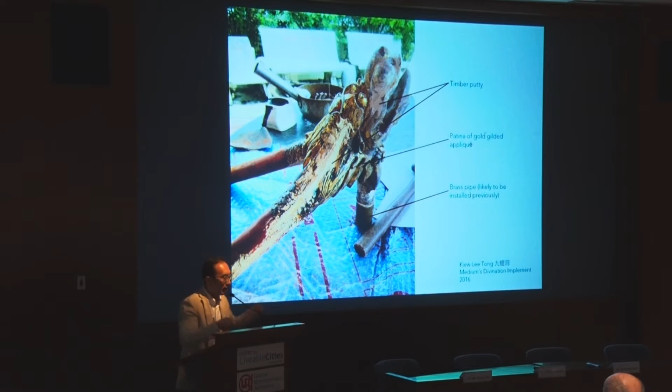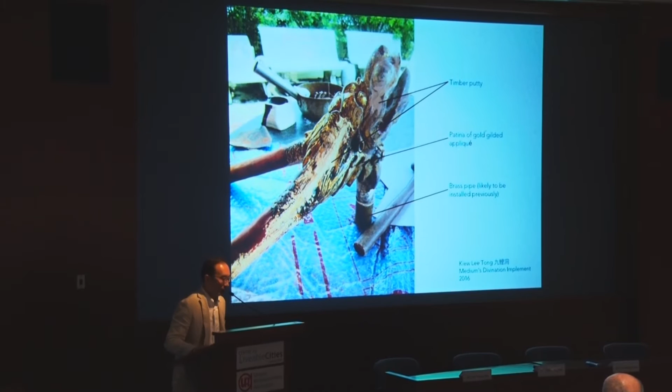You hold it - the medium will hold the fork, and the one in the base, which is a brass pipe probably installed previously, was then used to write on a sand plate for divination when the medium is actually being possessed by the deities.

So here we are. I talked to the craftsman, who was actually a member of the temple, and he was repairing this particular piece. So I asked, how old is this piece? I was very excited about this.

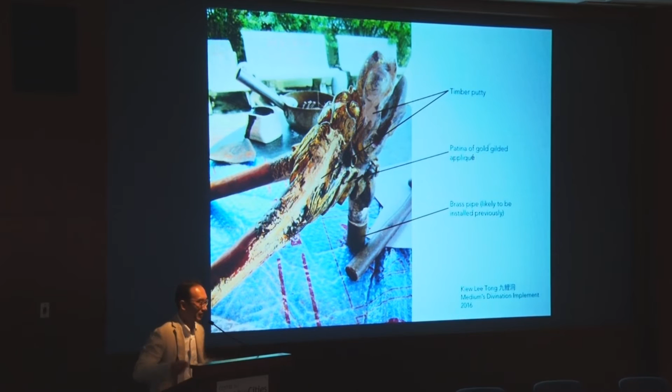Probably around three generations in the possession of the temple. There were cracks because the medium is very excited, right? And there are cracks, and he has applied some timber putty. And on this, there's a very nice patina.

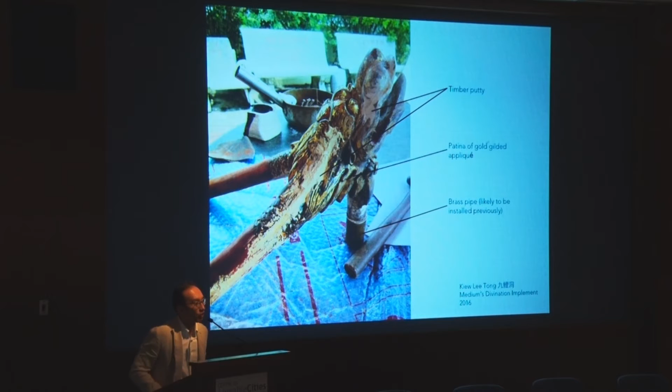And as our conversation progressed, he got excited too. He went to the storeroom and took out a piece that is complete - he has completed the restoration, and this is it.

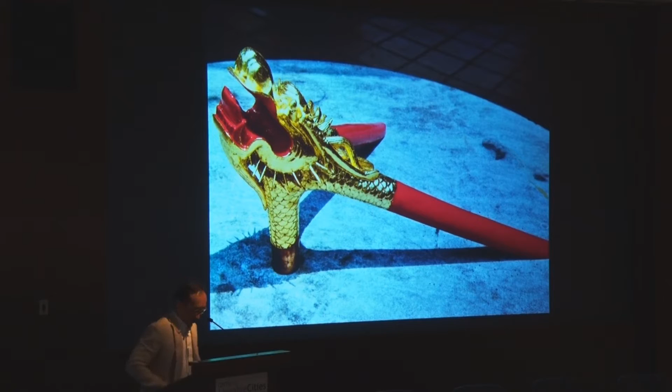And this set me thinking that there is actually a very strong distinction between the Western approach towards restoration, which we have all inherited, and the very different Eastern approach to restoration. So what is restoration? In this region, especially Chinese and Southeast Asian contexts, there's a very strong tradition of practice in terms of restoration.

And what - should we then overemphasize the quality of the material of restoration? And perhaps after maybe decades of use, you will also achieve a certain patina, right?

So, like the keynote speaker mentioned earlier, talking to us about doctrines of restoration throughout the years - right now, in modern day, we essentially have two diverging approaches: the positivist and the relativist. The positivist is the substantiation of the historic material fabric and privileges the object, which we inherit as a kind of tradition and philosophy of restoration. The relativist is premised on the idea that we should go beyond consideration of the material culture and fabric.

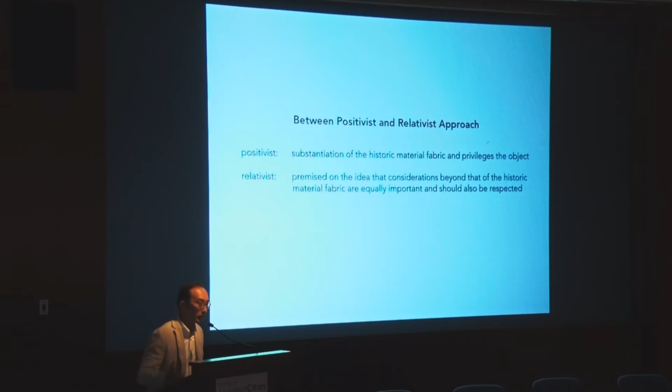All these are actually very well-known ideas - the positivists started with the Western world, John Ruskin's idea, and the relativists started with the example given by Japan. In 1994, you have the Nara Document on Authenticity, widely discussed, and subsequently the Burra Charter also talked about giving privileges beyond the material fabric.

I would like to mention something I was also toying with - that perhaps in this particular region, for different approaches to conservation, we need to promote the idea of conservation as merit making, not so much the concept of restoration or renovation or addition to a building. Especially in Buddhism and Taoism, the idea is that when you add on to a religious site, it's a form of merit making. So perhaps there's a shift in mentality - a psychological shift, a conceptual shift - towards this idea of conservation.

Of course, in Singapore, we are quite blessed. Since the 1980s, we have established the role of conservation, and the principle is highly distilled into the 3R method, which is maximum retention, sensitive restoration, and careful repair - a method most consultants in Singapore are widely familiar with.

It's been made highly distilled, so it's easy to digest and understand, and applicable to consultants and even lay people and owners alike.

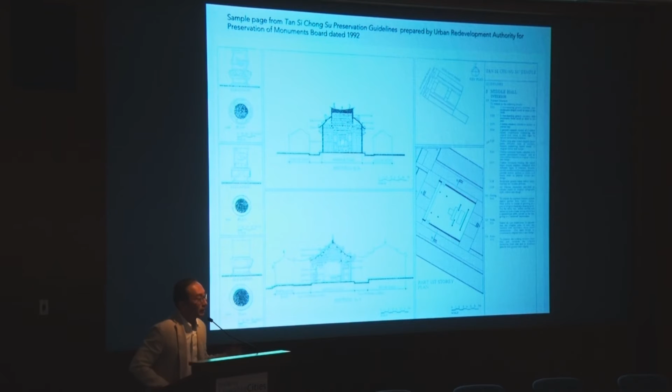These formulas, these 3R principles, had their origins in the positivist principles and approaches that I mentioned earlier. Later, Ms. Mei-Cho will give a full picture of the restoration history of Singapore. What happened was that the guidelines prepared for restoration and conservation were essentially based on these positivist ideas.

I would like to mention one example where different approaches to conservation had serious conflicts in recent years: the case of Tan Si Chong Su, or Chen Si Zhong Ci, from 1999 to 2002. In 2003, Singaporeans woke up to newspaper articles about charges over temple changes, with a temple official accused of illegal changes to the monument.

So what is this? The Chen Si Zhong Ci, or this temple, is actually a building constructed in the late 19th century, between 1876 and 1878. It was an ancestral temple of the Tan clan, and it was gazetted as a national monument in 1974.

Then from 1999 onwards, the temple trustees carried out a series of changes without submitting plans to the authorities, which subsequently led to a legal court case.

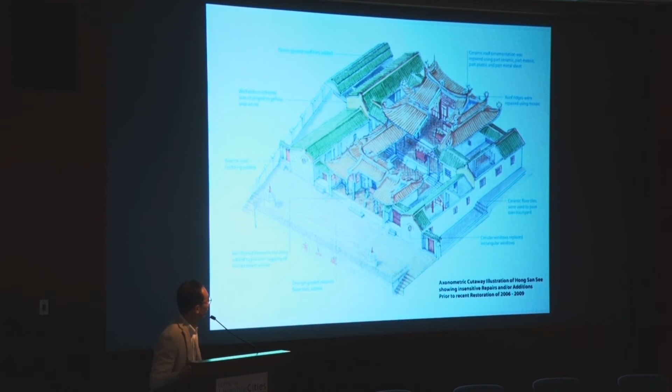This is how it looked prior to the recent restoration, and this is how it looked afterward. This particular restoration is quite interesting, and I believe it perhaps points toward mending the difference between the positivist and the relativist approach in restoration.

This temple restoration was a ground-up effort led by the Temple Restoration Committee. The Chinese committee knew about the earlier case of the illegal restoration of Tan Si Chong Su, and they were careful not to repeat the same kind of legal problems that arose from differences in conservation approaches.

So what's very important is that they set up a series of objectives and aims in terms of restoration—to rediscover social and architectural history, and more importantly, to revive the community spirit in this shared heritage. Imbued in all this, in the objective action plan, is the idea of conservation as merit making.

Here we are. The entire roof is actually newly made, because in order for the restoration to take place, you have to remove the roof to get down to the timber members to repair them. So while this is actually a process in traditional Chinese architecture, the intention is articulated to authorities that allow the total reconstruction of the entire roof.

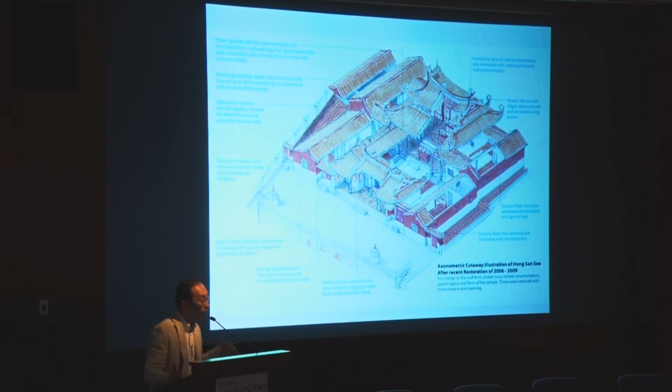But is it really about the difference between fabric and form, or could that be a combination of the two? We privilege the fabric, we also privilege the form. It depends on the context in which the building is being restored.

The same approach in restoration was then further taken on by another project, the Yueh Hai Ching Temple, Wak Hai Cheng Bio, in 2012. This is the beam raising ceremony in 2012, where the same approach was used — setting up objectives of what exactly the restoration is about, and how it is not a renovation.

The ideas were actually widely discussed with the community, with the owners. It's not about adding on to the building for merit making — it's a concept of restoration that will bring about merit to the people and to the owner, not dissimilar to the first case, the groundbreaking case of Hong San See Temple.

So this is an axonometric drawing before the restoration, and this is the axonometric drawing of the building after restoration. While the accomplishment of these local projects is actually quite encouraging, I think it should also be noted that the aims and results of much of this restoration rest upon the efforts of various parties involved.

The owners and the authorities need to enter into very meaningful discussion about the definition of restoration — what is restoration to the people? It's therefore not incomprehensible that...

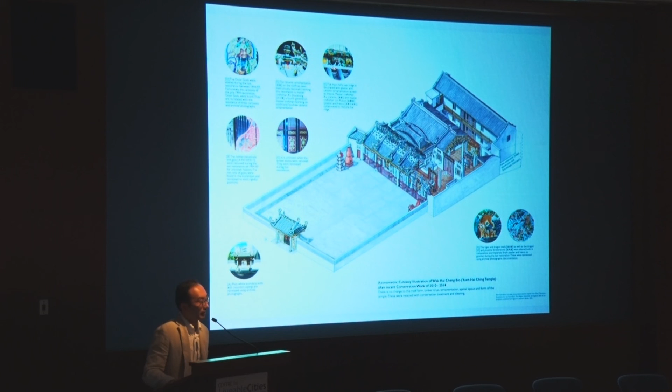the positivist approach that was developed in the West is therefore applied to the East, when we adopt such methods uniformly applied to all buildings in Singapore and in the region, especially when we are imbued with different religious traditions in our culture. So in the Asian context, it's also very apparent that such a purist or positivist approach is rather inappropriate and may be a challenge to apply in its entirety.

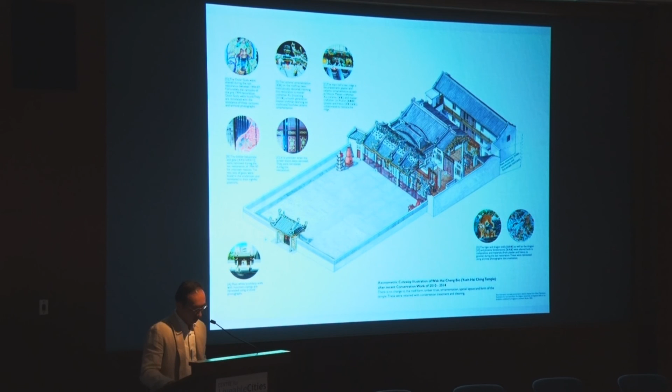And therefore, it's about time that we took a balance between these two approaches and rethink a kind of mental shift between the positivist and relativist approach, and move towards the concept of merit making.

So this is a very simple point I'd like to make in my presentation about the difference between East and West. It's not so much about the differences, but finding the similarities in having an open dialogue, an honest discussion between various parties involved. Perhaps, especially for this region, the concept of merit making has to be reshifted, and we need to promote conservation as merit making. Thank you very much for my short presentation.